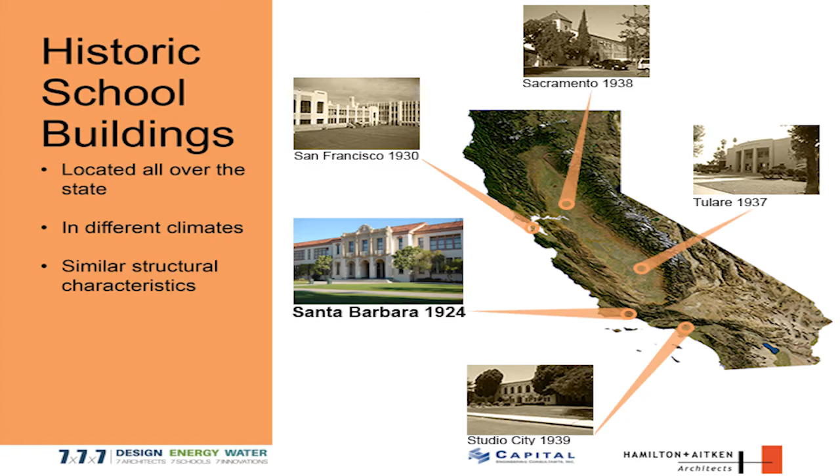So we have schools like this in every region, every climate zone in the state. Our particular case study is looking at Santa Barbara High School. It's in the coastal zone, but we've looked at data from all over the state. And we think there are lessons that are applicable to the entire state and some even for new schools.

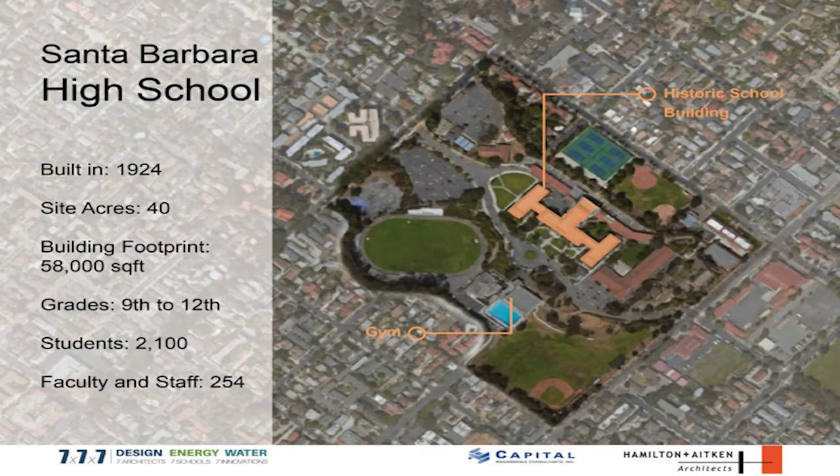So Santa Barbara High School was built in 1924. It's a Spanish Revival school, very, very beautiful. In 2005, it was declared a California Historic Landmark. You can see some of the quality of the architectural detailing. Like many of our old schools, it's a cast-in-place concrete building.

It has steam heating systems, and these are still in service, usually after up to 90 plus years. Most of the schools have no cooling system, even in the inland areas. So we're going to try to see how we can take these existing elements and use them to move toward zero net energy, zero net water.

As these schools are modernized, we have opportunities to begin to take steps toward net zero. But because of the historic nature of the buildings, there are some things we don't really want to do, because we don't want to install features that are going to take away from the architectural qualities that we're trying to save. We are going to review steps that we can take with every modernization to move toward net zero. Steps that would improve education, move us toward 21st century learning, steps to reduce water use.

We don't need to get there all at once, but it is important that we begin to take steps and that we make the right steps. We don't want to build things now that we need to change later in order to get closer to zero. A lot of work needs to be done on these buildings. We'd like to tie every modernization to some element of energy and water savings. Every step we take to modernize needs to be very carefully thought through. We need to think about energy modernization as a long-term process, a process with a transition plan, much like the ADA transition plans that we have, so that each step builds toward net zero.

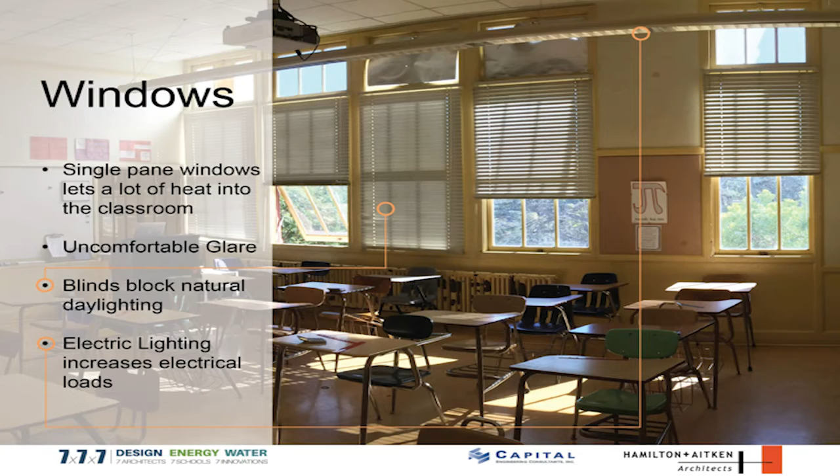Let's look at one example, a very common example, replacing school windows. These schools have old wooden windows. They're in physically poor condition. They're drafty. They're very high maintenance. They let a lot of heat in and let a lot of heat out. And they use clear glass, which has no shading factor.

What we found is that the rooms are uncomfortably hot. And to control this, the users close the blinds. That helps a little bit to block the heat and glare. But then they turn on the electric lights. So we have these beautiful old schools with very large windows that were actually designed for daylighting, and we end up using electric light almost every day of the year. Lighting accounts for about 60% of the electric energy used in schools. And we can't ever get to net zero if we don't start using daylighting for our buildings.

So when we do replace windows, it's really important to make the right steps. We can't just replace the windows to the minimum energy standards. If we do that, we'll solve two of the problems we've got. We'll have nice new windows, and we will start to reduce envelope heat loss. But we can't solve the biggest problem, the one that contributes the most energy, which is direct solar gain. In order to do that, we need to actually invest in high-performance glazing. Glazing that stops heat energy from coming through the glass.

It's a lot more expensive, but if you're worried about the cost to install this kind of glass, imagine the higher energy costs you're going to have to pay if you don't do it. Imagine the natural daylighting you're not going to be able to have in your classrooms. And imagine how much more expensive it's going to be when you have to replace that glass again to control heat gain.

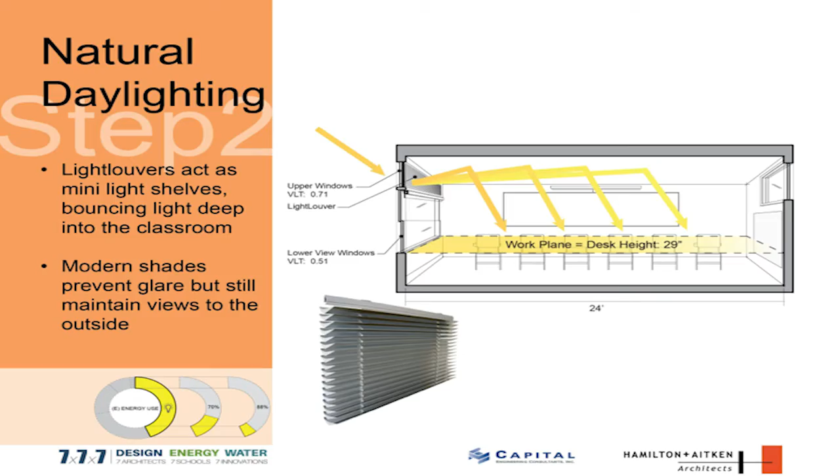Another future step would be to replace the fluorescent lighting with LED lighting, which could result in about a 90% electric energy savings. This would get the lighting energy use down to about 28,000 kilowatt hours per year. If you think about supplying that electricity on site, it means you'll be paying for a lot fewer photovoltaics.

So replacing windows is really key as a step toward moving to net zero energy for lighting. We can improve the quality of our education as we do that at the same time. Now I'm going to introduce Aaron Wintersmith, who's going to talk about some of the steps to reducing energy and providing more energy efficient heating.

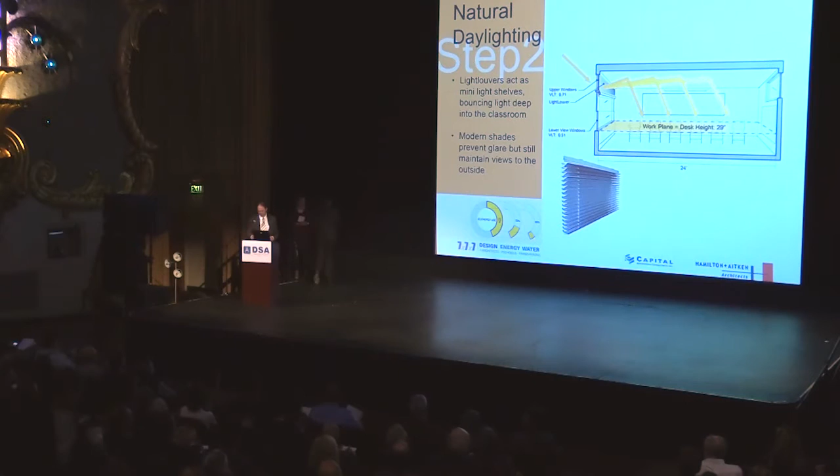Thank you. Thanks, Chad. So as Chad mentioned, the existing heating system for this campus is a steam heating system, which is really typical of buildings of this age. The issues we have with the heating system start with its age, right? 90 plus years. Really the action left to take with that is to replace it.

It also suffers from a low inherent fuel efficiency, a high cost of ownership due to the fuel and maintenance. And there's really a limited opportunity to use energy you might generate on site because the steam system uses such hot water. It's really presenting a barrier towards moving to net zero on the campus.

I think the cooling system is pretty straightforward in that there is none and the users expect there to be one. It's really a distraction to the classroom environment without it. So our solution needs to provide cooling for that space to meet the user's expectations.

The first step for the heating system is really to replace the existing steam system with a hot water system. In this case, for the first step, we're proposing a condensing gas boiler. What this does is transition the system to a different source that is much more able to use energy that we might be able to generate on site.

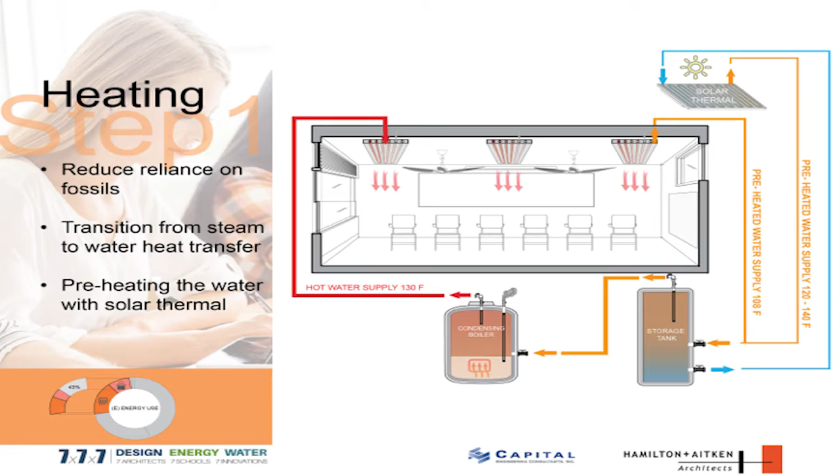In this case, the lower temperature water is very useful and can be generated by solar hot water heating panels on the roof, right? So we cut our reliance on fossil fuels. And the proposal here using radiant heating in the classroom doesn't have any moving parts in the classroom, which really improves the classroom experience. Step 2 for this system would be to change the source here.

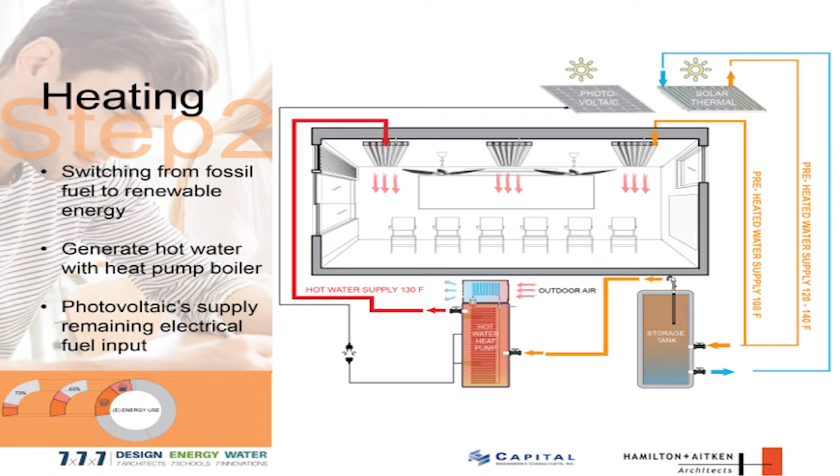You can see we moved to a hot water heat pump boiler. What this does is it removes the CO2 pollution on site by getting rid of that natural gas boiler and leverages those other systems, right? This system continues to use solar hot water, but it also uses the electricity generated by the on-site PV panels, raising their utilization factor and really improving the economics of that overall system.

In this case, the source of that hot water is flexible per site. For Santa Barbara, we've proposed an air source heat pump boiler, but other sites might look at using a water source boiler or a ground source boiler. To get cooling in the classroom, we would use the same radiant panels that we've proposed for the heating system. Again, no moving parts in the classroom, improves the environment.

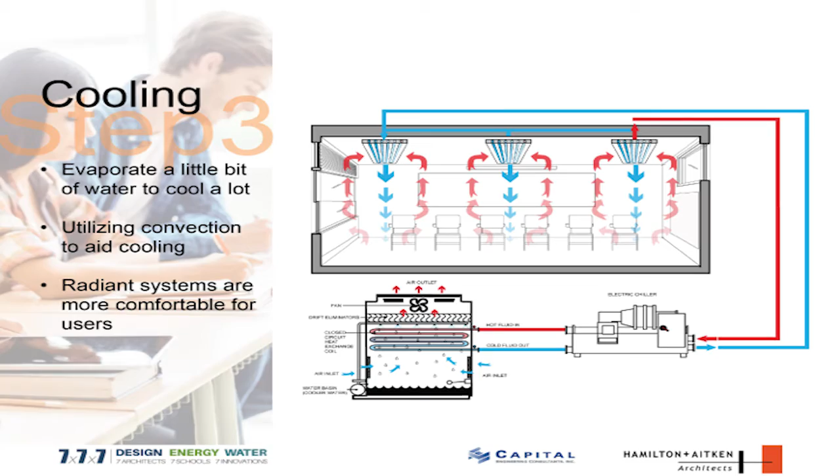And this system allows flexible sources like we saw in step 2 of the heating system. We show here a classic chiller system backed up by a cooling tower. So that is probably the most conservative layout of this for the inland climates. In Santa Barbara, we believe you could eliminate the chiller entirely and use only the cooling tower, which is a very low energy solution. You could also use new technology.

We're starting to see air-cooled chillers that have a lot of variable speed capacity and very high efficiencies. You could use that source on site. So all of these work together to move you along the steps towards net zero while providing a flexible path. Amy's going to talk about water savings.

Water, it tastes good. Anybody here not a fan of water? I didn't think so. So I have the right crowd. Let's all agree that today is the day that we change the way we think about water. Let's get that thirst quenching feeling from not only the way we use water for our bodies, but also how we use water in our buildings.

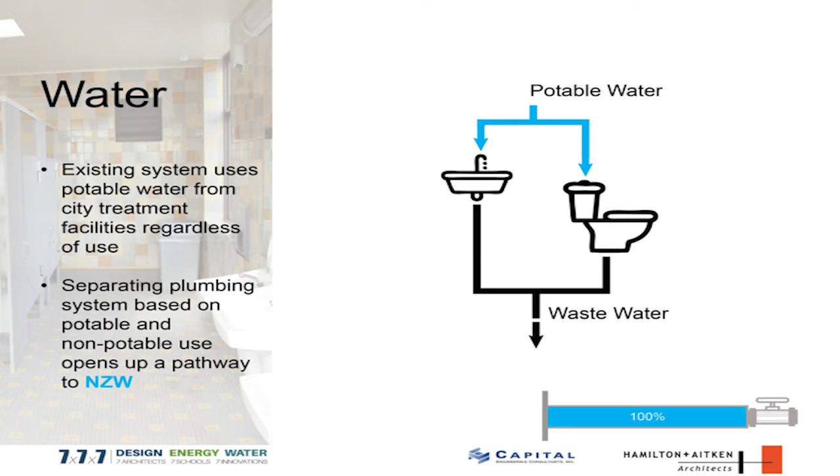So with Santa Barbara being a historical school, the facade is really valuable to us, but the plumbing is definitely at the end of its lifespan and is ready to be replaced. So instead of replacing it in kind, I'm suggesting to put in a dual system, 2 supply lines and 2 drains. By putting in a plumbing infrastructure that recycles water, we're now clearing the path for a net zero water future.

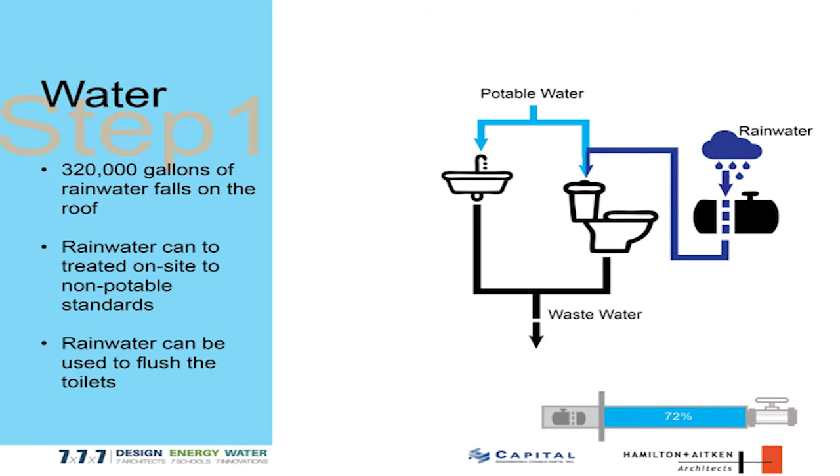And what that future looks like is collecting the 320,000 gallons of rainwater that falls on the roof each year, treating it to non-potable standards, and reusing it as we collect it to flush the toilets. This is relatively easy. We know how to do this right now, whether or not regulation supports this.

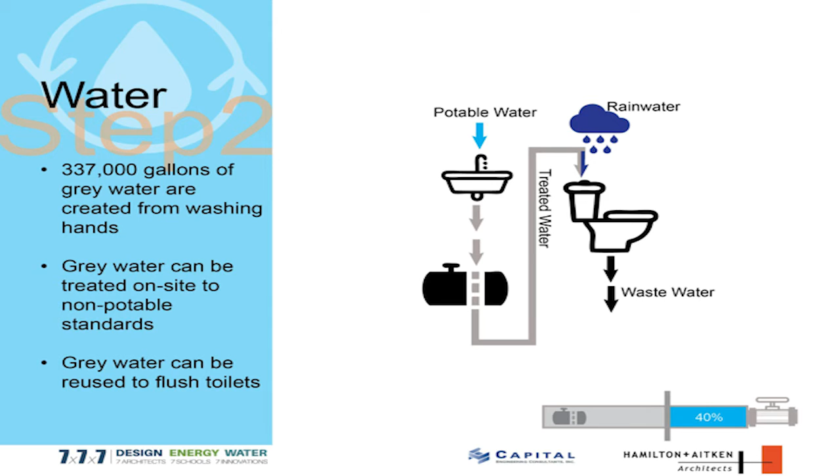Step 2, which is also rather easy, is collecting the gray water, so water from washing your hands, treating it to non-potable standards, and using that water also to flush the toilets. So now, with the rainwater and the gray water, 100% of the potable water that you were using to flush the toilets is now recycled water. And that's a good step to moving forward.

But what gets really interesting is putting in a wastewater treatment facility on site. So now, as you use water to flush the toilets, you're treating it on site with a constructed wetlands and some tanks, some filters, and reusing that continuously to flush the toilets. I think this is really important to close the water loop on campus. Now, this is much, much more difficult, but it's not impossible.

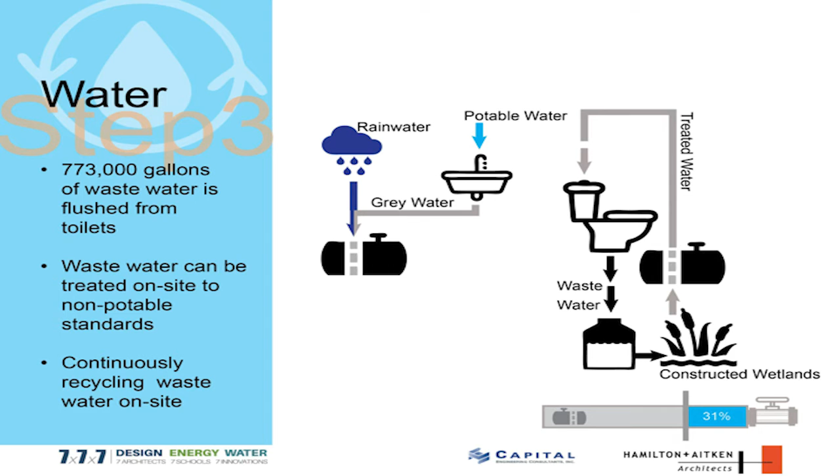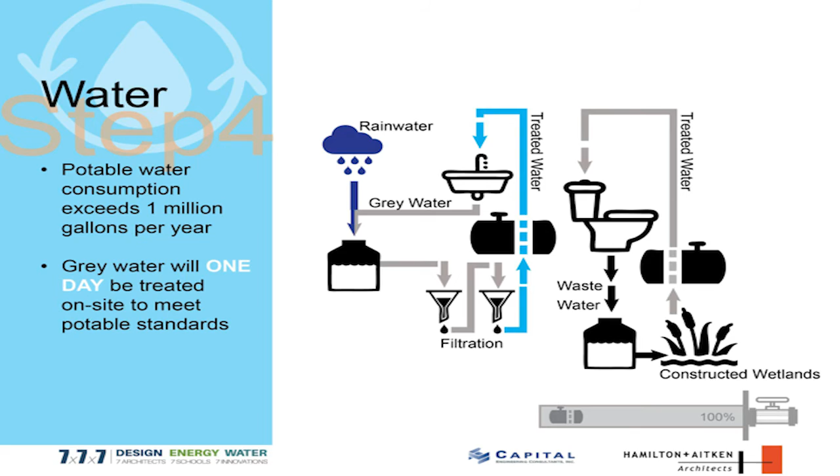So dream with me for a second for step 4. And that's taking the rainwater and the gray water and treating that to potable water standards so that now you have potable water on site. You have closed both the loops on site. And that's what we're going to do, but that still doesn't give us that thirst quenching feeling yet.

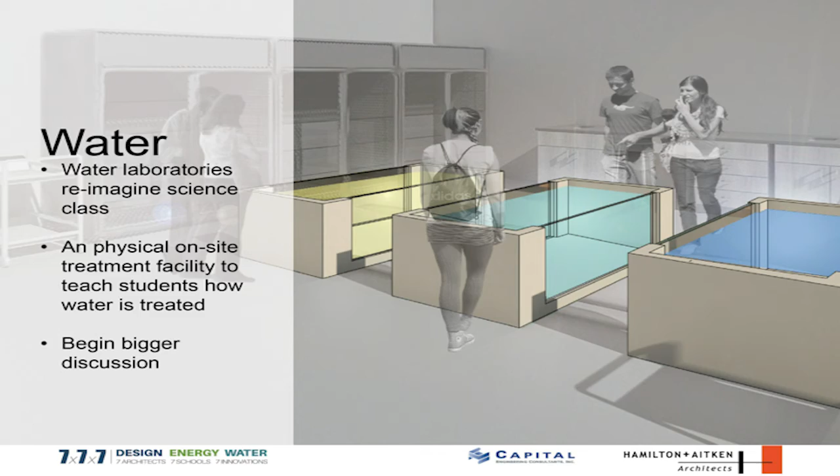What comes out of these possibilities is we change our image of schools, right? We're no longer thinking of a historic school with a beautiful grassy lawn. We're thinking of a historic school with a constructed wetland in front of it that starts to be a working system of the building. You have water labs. If you're treating the water on site, you have a laboratory for which you can educate kids on how water is treated on site.

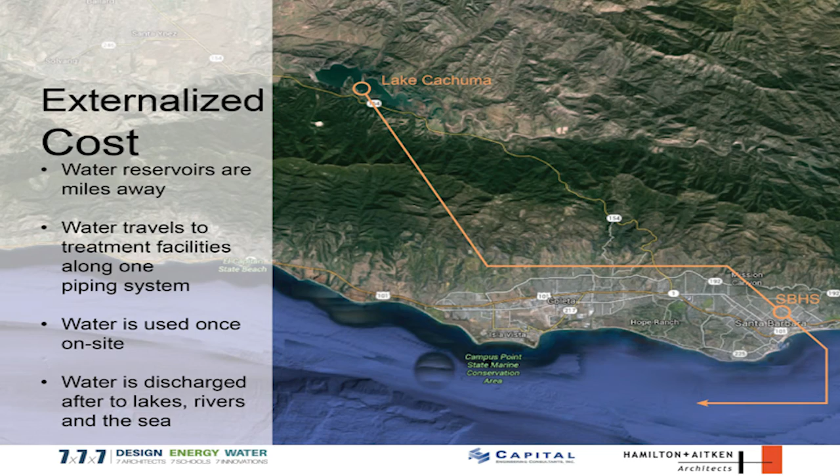You also start to bring up the discussion of externalized cost. By treating water on site, you're no longer externalizing the cost of that water treatment. You can also begin to discuss in schools the externalized cost of cheap fossil fuels, right? And that's a discussion we should have earlier and earlier, so when students today are in charge of making decisions for our community, they're better prepared to do that.

And then lastly, when we have a system that provides potable water, our schools become the hub of the community. What if, in the event of an emergency, like an earthquake or a terror attack, the water that we're piping in from several miles away, we don't have access to that anymore? So if a school is able to provide that for the community, you're able to get through that emergency, repair those systems, and get back to working order.

So I know today we have talked a lot about big steps, and those are not going to happen overnight. But I want us all to agree that today we will start making steps toward a better future, and that's with the modernizations that we are doing. We no longer block the path to a sustainable future, but we make decisions that will lead to a sustainable future. Thank you.